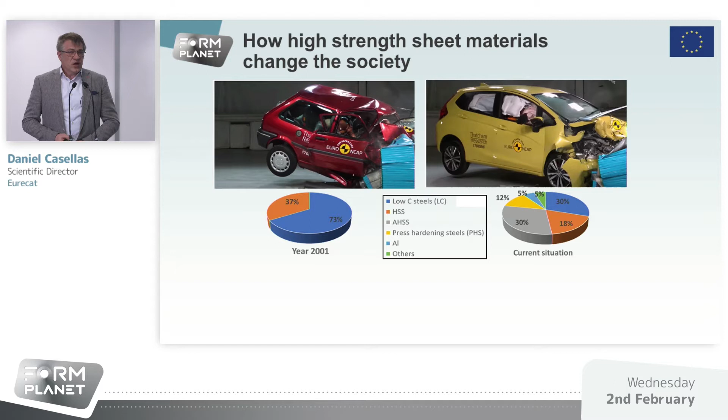We see here that high-strength steels and aluminum alloys play a major role in current cars, and they will be the dominant engineering materials in the body in white vehicles of the coming years. This is because they allow to construct lightweight structures in an affordable and sustainable way.

The use of high-strength metal sheet in the European industry is increasing in the last years. Automotive and aeronautic sectors are driving this growth, mainly pushed by the constant demands on high-performance parts for lightweighting. However, if we want a complete deployment of these high-strength materials, we need that the European industry can manufacture high-performance parts in an efficient and sustainable way. And this is where the high strength of these materials may be a problem.

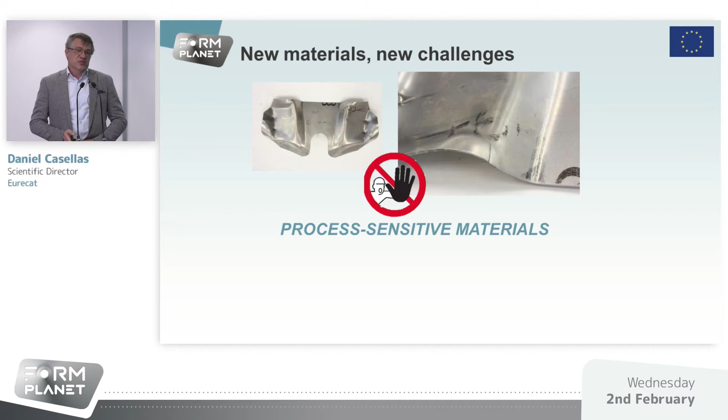Here we see an industrial problem that is known as edge cracking. We will talk about this today. This is an unexpected defect that happens during metal forming. So high-strength materials in general can be considered as process-sensitive materials, which implies that forming parameters and the raw material quality must be carefully assessed to produce defect-free parts.

The problem, or the challenge, is that these unexpected fractures cannot be predicted by conventional experimental techniques or by current modeling approaches. Then, as always, new materials bring new challenges. So today, in this seminar, the FormPlanet team will share with you the recent developments in advanced characterization techniques, in modeling, in process monitoring, and in materials intelligence to face these challenges that the metal industry is addressing.

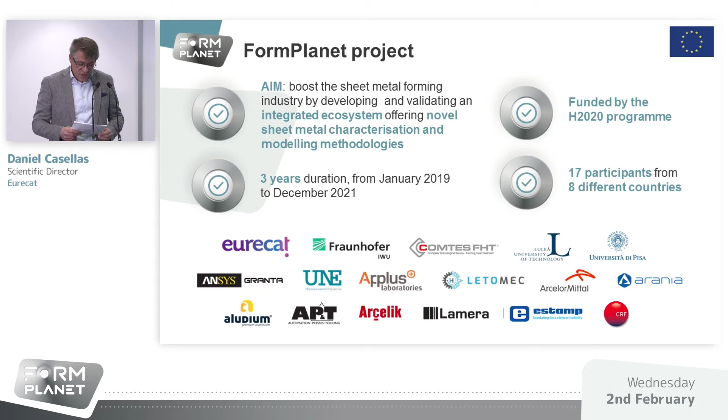Thank you, Daniel. I'm going to give just a brief introduction about the FormPlanet project. This is a European project with the aim to develop and validate an integrated ecosystem, called a testbed, to offer novel sheet metal characterization and modeling methodologies. This project has lasted 3 years and ended in December of last year, 2021.

The consortium of FormPlanet has consisted of 17 participants from 8 different countries: 3 technological centers, Eurecat, Fraunhofer, and Comtes; 2 universities, Luleå and University of Pisa; 4 service providers, ANSYS Granta, UNE, Applus+, Letomec; and 8 industrial partners, ArcelorMittal, Arania, Alupium, ART, Arçelik, Lamera, Estamp, and CRF. Now we are going to project the FormPlanet video. You will see summarized very well the main objective of the project.

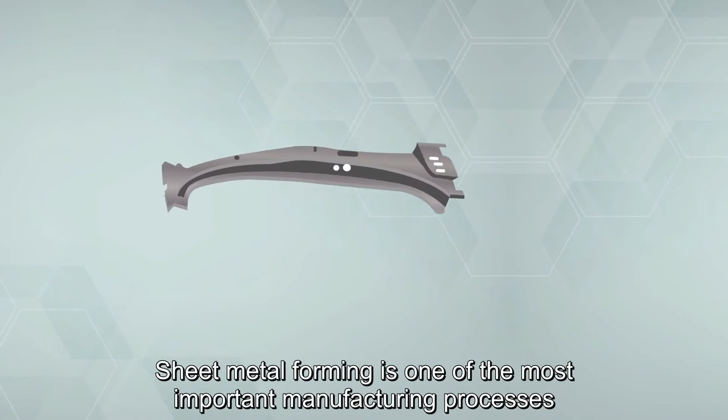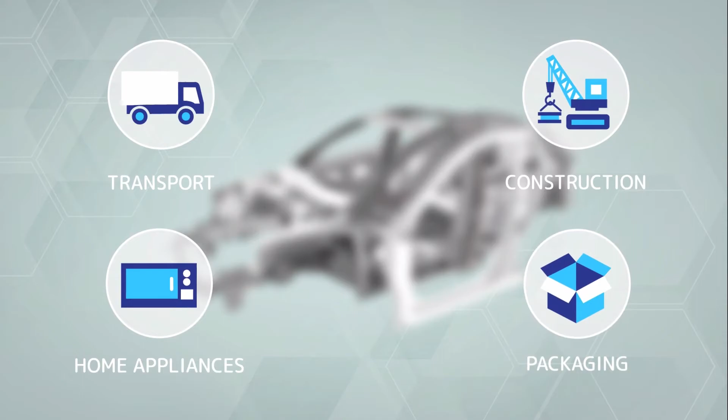Sheet metal forming is one of the most important manufacturing processes to obtain metal components for almost every industrial production sector, such as transport, construction, home appliances, and packaging. Generating over 500 million euros, this industry lacks adequate methods to assess sheet formability and part performance at the product design stage, essential to be able to develop high-performance parts at a reduced cost.

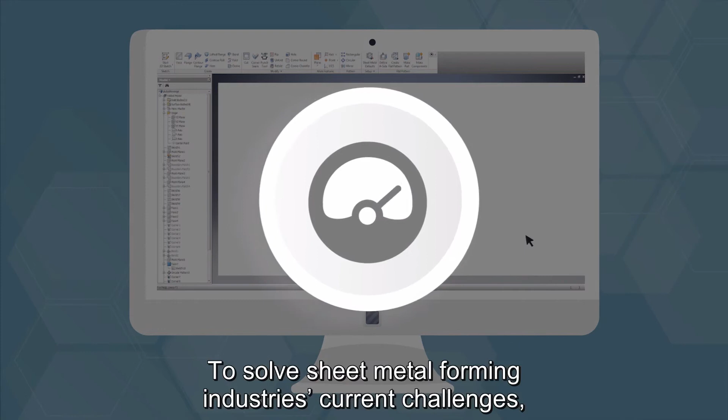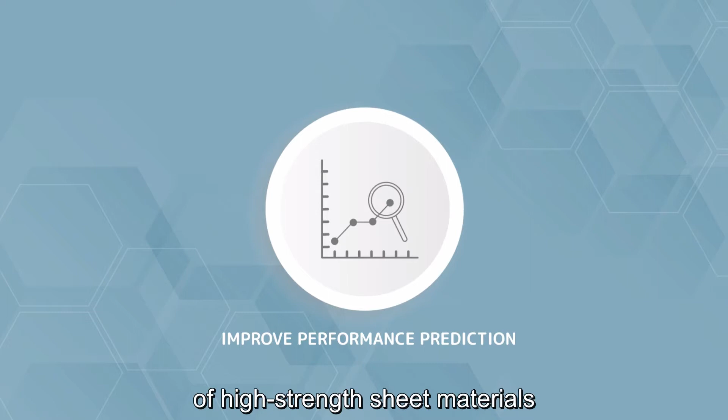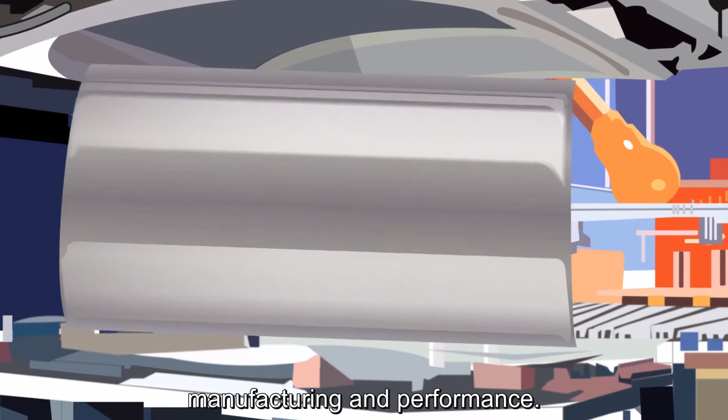To solve sheet metal forming industry's current challenges, the FormPlanet Open Innovation Sheet Metal Forming Testing Hub has been launched. Funded by the European Commission, we will offer to all kinds of companies in the sheet metal forming value chain novel testing methodologies and modeling approaches to improve the performance prediction of high-strength sheet materials and prevent production losses. This assures zero-defect production and the optimization of sheet materials development, manufacturing and performance. Thanks to FormPlanet, European companies will be able to access the services of 5 leading materials characterization centers from one place with equality of access and conditions.

A one-stop shop service combining the technological experience of consolidated metal characterization sites and cross-cutting service providers to facilitate companies' technological uptake. With novel and differentiated material characterization tests, new modeling approaches, part quality assessment, and in-process measurements, materials informatics, incremental sheet forming prototyping, and support services. A boost to the competitiveness of the sheet metal forming industry. Contact us to learn about our service offer and how FormPlanet can help your company.

Now, after these 3 years of project, we would like to share with you the main outcomes and the main results of this project during this event. I'm going to give you some facts very quickly, but during this event you will have more information about the results of this FormPlanet project. In the first year and a half of the project, we have developed advanced testing methodologies for more accurate sheet metal characterization and non-destructive in-process measurements and modeling. These methodologies and modeling approaches covered the whole value chain of the sheet metal forming industry, from the sheet material development, also the part and forming process design, to the components production.

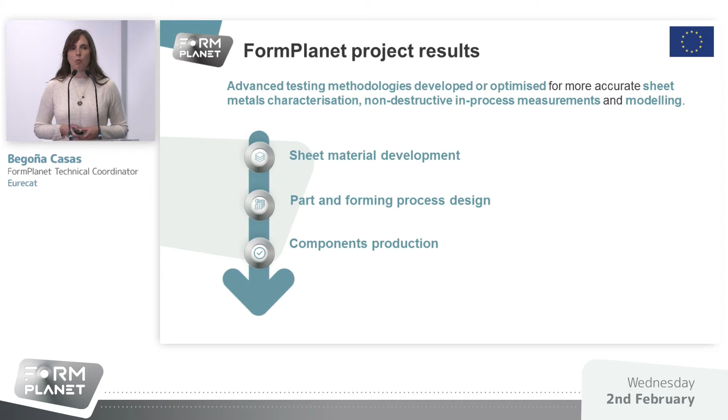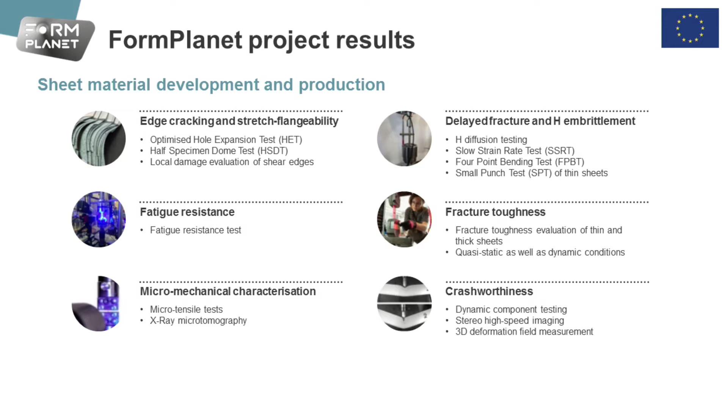Just to give a very brief idea of the methodologies that we have developed in the project concerning sheet material development and production: we have developed solutions, for example, for edge cracking and stretch flangeability, for delayed fracture and hydrogen embrittlement, also for fatigue resistance, fracture toughness measurements, micromechanical characterization, and crashworthiness determination.

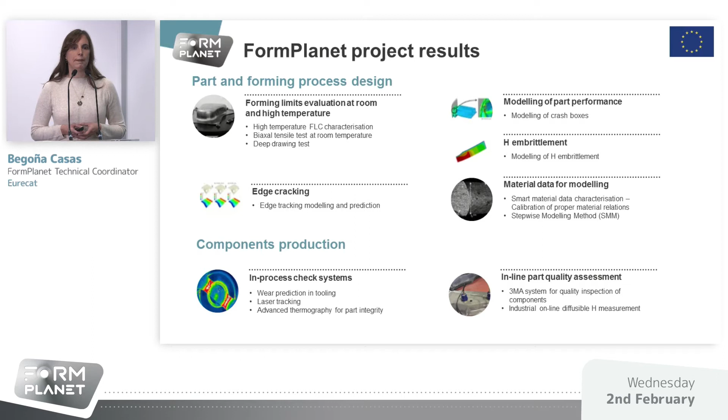Concerning part and forming process design, we have developed solutions to evaluate the forming limits at room and high temperature, for modeling part performance, also modeling hydrogen embrittlement, edge cracking modeling and prediction, and material data for modeling. Concerning components production, we have developed also in-process check systems and inline part quality assessment.

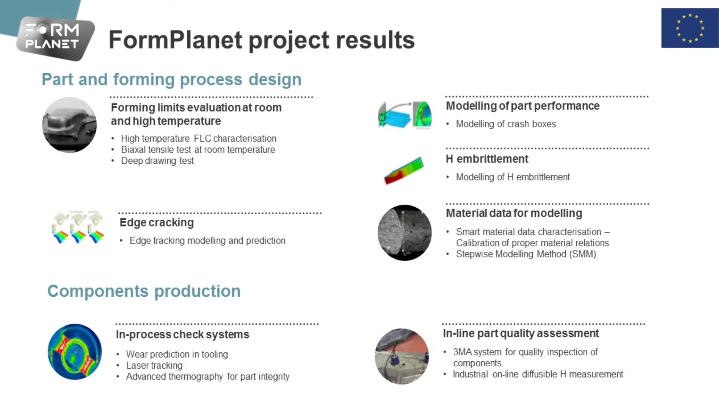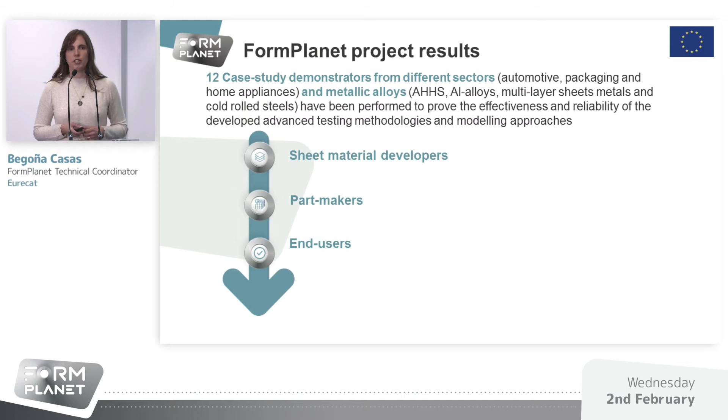To validate and prove the effectiveness of these methodologies and modeling approaches developed during the first years of the project, we performed 12 demonstrators from different sectors and metallic alloys with industrial partners of the project and also with the test sites. And these demonstrators covered all the value chain of the sheet metal forming industry: sheet material developers, part makers, and end users.

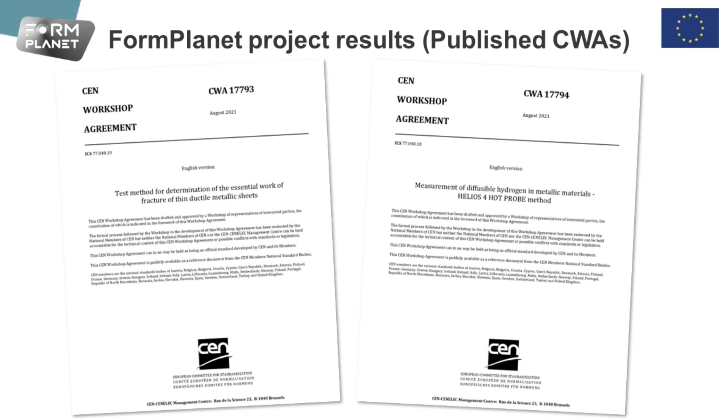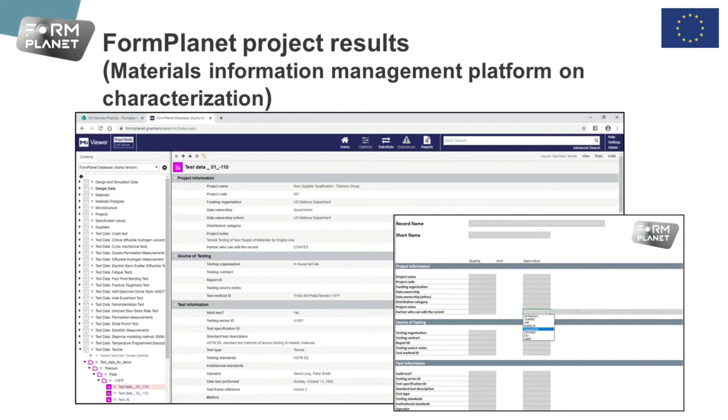During the project, we have published 2 CEN agreements with the objective of standardizing 2 novel techniques developed in the project. ANSYS Granta, a partner of FormPlanet, has developed a materials information platform on characterization with the help of all the partners.

And we also launched an open call during the last year to offer companies outside the project the opportunity to prove our services. 7 companies were selected in this open call from different European countries and different sectors.

And finally, the most important outcome and challenge of this project is the creation of the open innovation test bed for sheet metal characterization and modeling. It will consist of a single entry point to access or to offer services from leading characterization organizations. And all this will be explained in more detail during this day.

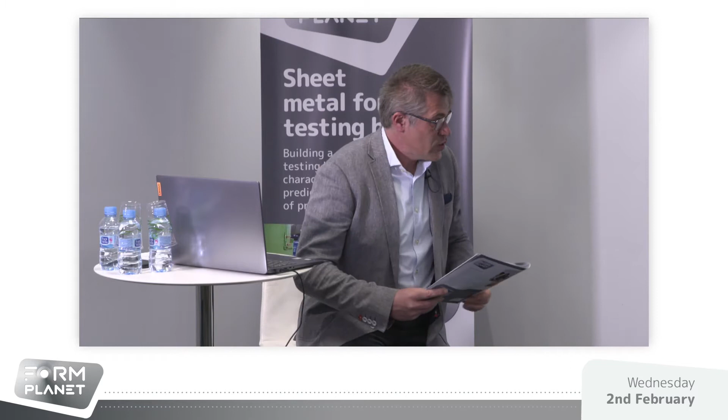Is this the mic? Yeah, this one. Thanks a lot for the presentation, Daniel.

As Daniel just mentioned, I will present the need for OITBs, EU policies, and funded research. These are the points I'm going to talk about today. I'm going to start by defining what an open innovation testbed is, because that's our main topic today. The Open Innovation Testbed is a set of entities which all together provide common access to physical facilities, capabilities, and services required for development, testing, and upscaling.

And all this covers from validation in the lab to the real industrial environment. All this is done through a single entry point. A single entry point is a legal entity defined and established by the project in order to manage all B2B relationships. It means giving access to these facilities, capabilities, and services to the end users, through this one-stop shop.

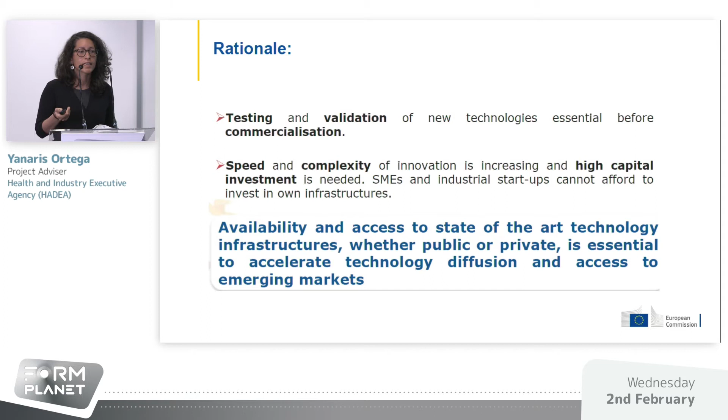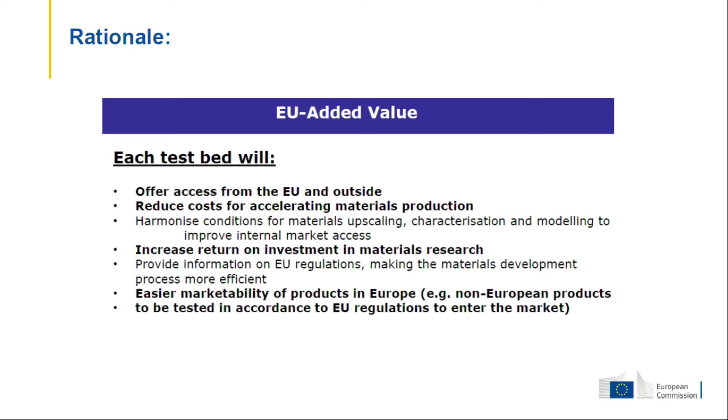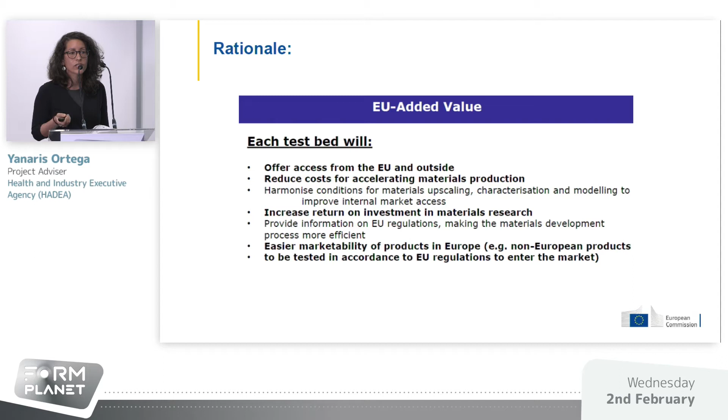So, as I said before, the OITBs will be bridging the gap between the lab and closer-to-market activities, so from TRL 4 to TRL 7. And what is the added value of the OITBs, and why are they so attractive for industry? Because they offer access to these capabilities and infrastructure. They reduce cost, which is an important point, but also raw materials and time to market. They harmonize the conditions for materials upscaling, characterization, and modeling, increase return on investment in materials, and make marketability of products in Europe easier.

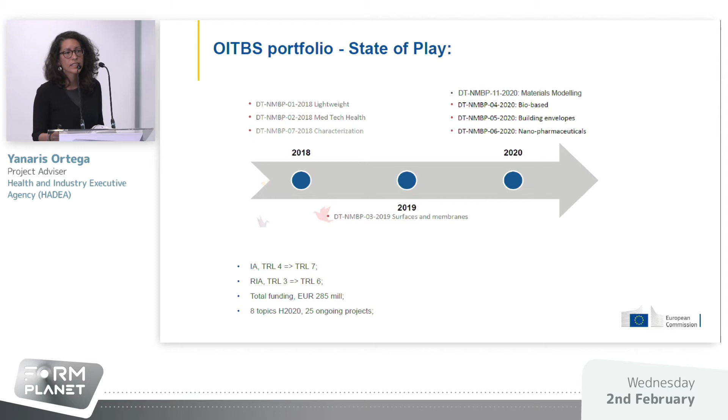At the European Commission, we have funded so far 8 topics with a total fund of 285 million, allocated in 8 topics and 25 projects. This is more or less the timeline for this portfolio of projects: 3 topics in 2018, the first generation of topics, then 2019, 1 topic, and 2020, 4 topics. All of them cover different expertise and different fields of research.

As I said, OITBs are a different kind of project. They are more complex, bigger in terms of beneficiaries, duration, and also funding contribution. On average, there are 26 beneficiaries, the duration is 49 months, and they have around 12 million of funding from the European Commission.

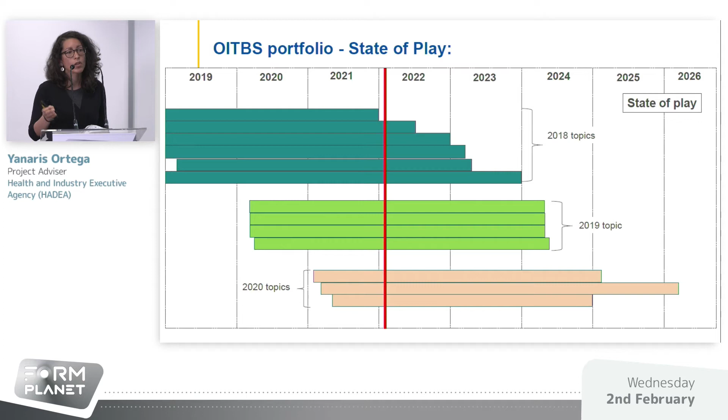So what's coming? Two main things. On one side, there is the organization of an OITB workshop. It's not organized by the European Commission. It's organized by the OITB projects themselves. So all of you projects, OITB projects ongoing or finished, but also industry or any kind of stakeholders that might be interested in this concept, in the services offered by the OITBs, are invited, because it's a good opportunity to give us feedback on the needs and the gaps that still need to be considered for funding. And also there is a call topic.

It's open currently in the Horizon Europe program, and it's on the climate neutral and circular innovative materials technology open innovation testbed. It's an innovation action. The funding is 34 million, and the TRLs to be covered by the proposals are between 5 and 7.

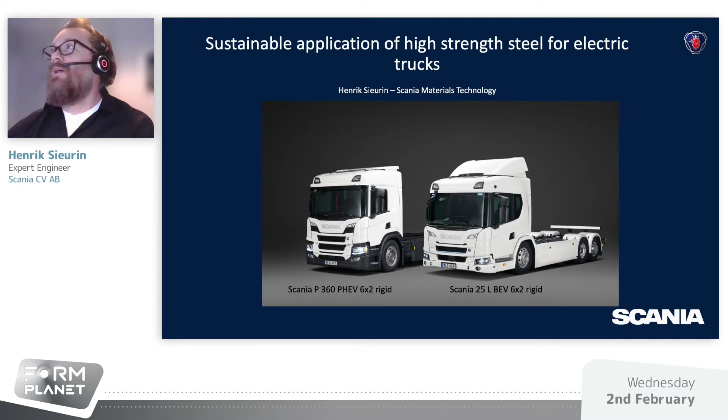So our purpose at Scania is to drive the shift towards sustainable transport. As you know, the world urgently needs to break the correlation between increasing demand for transport and increasing carbon emissions. So therefore, we are researching, developing, and promoting sustainable solutions for cleaner and safer transport of people and goods.

We are approaching a tipping point where the convergence of new technology and business models will result in a state where sustainable transport solutions will take off and become the new normal. And the current unsustainable solutions will be phased out. So the future of transport will for sure be decarbonized, clean, electrified, optimized, and digitalized.

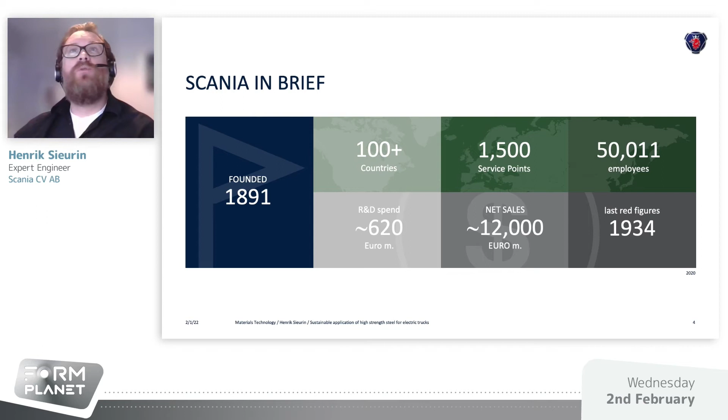So our trucks are mainly divided into three segments. We have long haulage, which is for sure the biggest segment, but we also have construction and distribution, and due to our modular system, we are very well equipped to also produce special need vehicles like fire trucks and garbage trucks.

One growing business is, for example, construction trucks for mining, which is a very flexible alternative to using big, expensive dumpers. Using smaller construction trucks is for sure a smaller investment cost, smaller service costs, and lower fuel consumption.

We also produce buses, both city and intercity buses. Traditionally, we have mainly produced chassis, but we are more and more producing complete buses. We also produce and sell engines, industrial and marine engines. For example, gensets for producing electricity, engines for agriculture, and ships and boats.

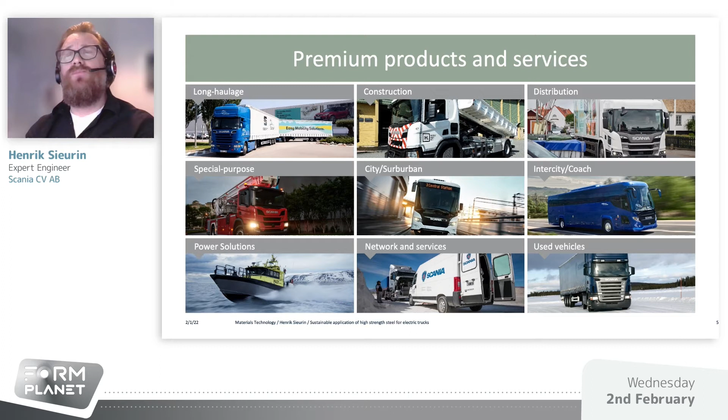One very important part of our business is the network and services, which include spare parts, maintenance, services like driver training, and financing. And we actually also sell used vehicles, which is a strategic business because we sell trucks and we can also keep the maintenance in Scania workshops.

So in order to commit to our sustainable transport vision, and so that it's not only some kind of buzzword for us, we have joined the Science-Based Targets Initiative, and we're actually the first heavy vehicle manufacturer that got this approved.

And our goal is actually even tougher, with 1.5 degrees instead of 2 degrees. And with this, we will reduce CO2 emissions from our own operations by 50% until 2025. And I think we have already achieved that goal.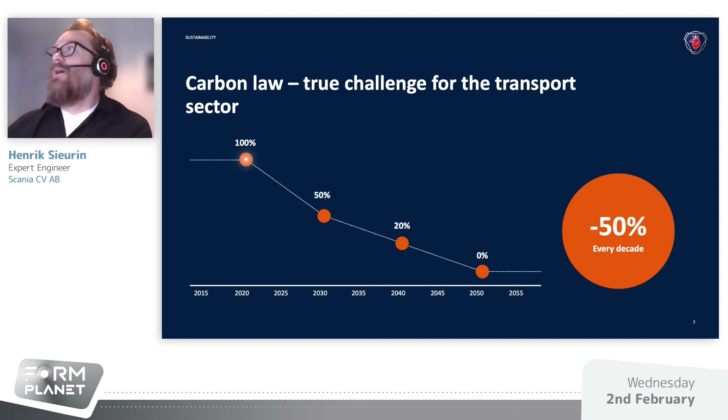So these climate goals are a really complex challenge for the transport sector. And the carbon law, a little bit simplified, says that we will halve our emissions every decade. So this is something that we have to fulfill. So when will electrification happen, and in what applications?

Well, this will happen much faster than we thought just 2-3 years ago. I think there are three reasons for this. Number one is the demand for sustainability from our customers as well as from ourselves. The second reason is cost. The total cost of ownership for an electric truck will be lower compared to an ICE truck.

And then we have the technical part. We already have batteries as well as charging, although of course we need to build a better charging infrastructure. So as already mentioned, in 2025 we expect around 10% electric vehicles, and by 2030 around 50%. And in 2030 we expect that more or less all applications can be driven electric, but of course it might not be an economically feasible solution for all customers and all applications.

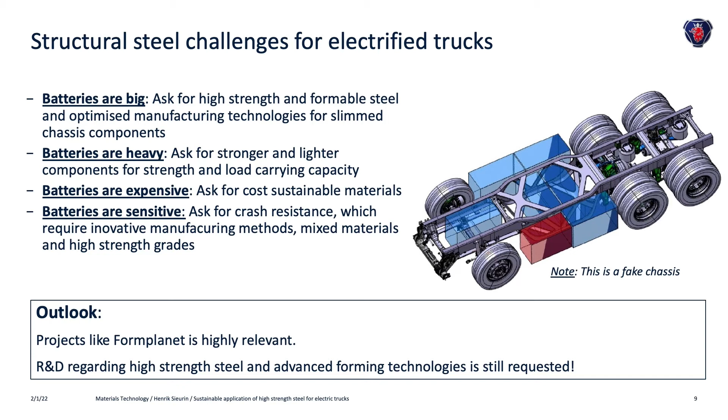And for this, we need high strength material and advanced or state-of-the-art forming technologies. Batteries are also heavy, and in order to maintain a satisfactory load carrying capacity, we need lightweight. In other words, we need high strength material. Batteries are also expensive, so we can't afford any fancy expensive material solutions.

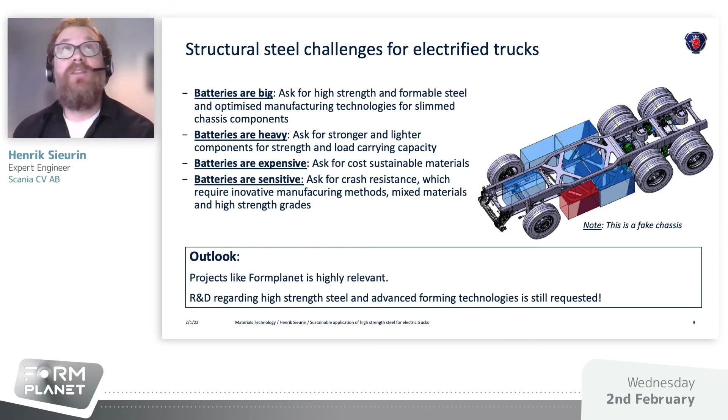And batteries are sensitive, so we need to protect them from crashes. So we need high strength material again with good energy absorption. We see a lot of mixed material solutions as well, and joining these is a challenge. So, to conclude this slide, I would say that projects like FormPlanet are highly relevant, and that R&D regarding high strength steel and advanced forming technologies is still highly requested.

Let's see what steel we use in our trucks today. If we start to look at the chassis, we mainly use hot rolled steel between 3 and 10 millimeter. It's mainly thermomechanical rolled steel, typically 355 MC or 500 MC or even 700 MC. We do use some press hardening steel also in the chassis for crash protection, for the bumper and the underrun protection.

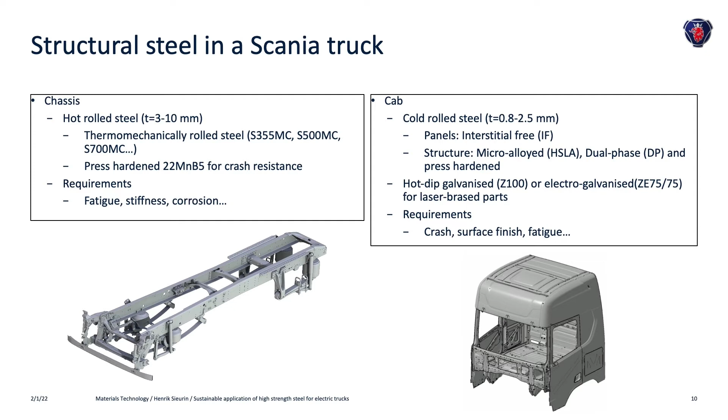And for the chassis, it's most often fatigue that is dimensioning, but also, of course, there are stiffness requirements, corrosion, etc. On the other hand, if we look at the cab, here we see really similar materials as we see in passenger cars, with similar thicknesses between 0.8 up to 2.5 millimeter. The panels are usually interstitial free steel. Here it's difficult to gain anything by using more high strength materials, since it's the stiffness that is dimensioning really.

Here it would be nice to have some thin material with high stiffness, like a sandwich material or something like that, or at least low density. But on the other hand, we need to have really nice surface finish. So that's a challenge. For the structure, we see high strength, low alloyed steels, DP steels, and press hardening steel, just as in the passenger car. And the sheets are galvanized, mostly hot dip galvanized, some electro galvanized as well. And the requirements for a cab are also rather similar to a passenger car, but with higher demands on fatigue, I would say.

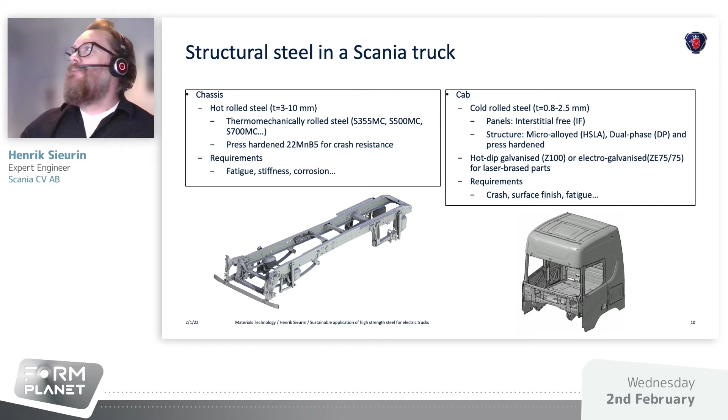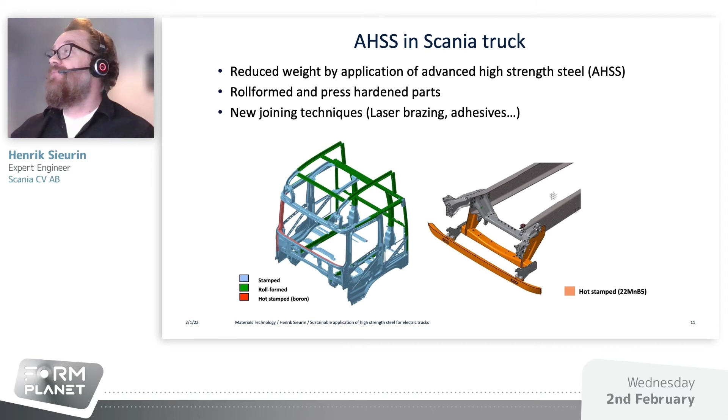So with our last cab generation that was released in 2016, we reduced, I think, around 10 to 15% of the cab weight by introducing advanced high strength steel, which was not used previously. We use a lot of roll formed high strength profiles in DP600, DP1000. We also have some press hardening parts like the A-pillar and this beam under the window. And the introduction of advanced high strength steel has also forced us to introduce some new joining technologies like laser brazing and adhesives. And as I said, in the chassis, we also have press hardening steel, relatively thick press hardening steel between 2 and 6 millimeter.

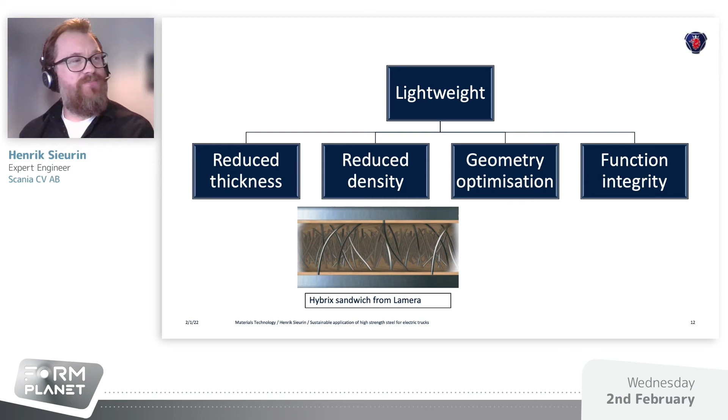We can optimize the geometry using topology optimization. The result from this usually is geometries that for sure need formable materials, so sheet material with good formability is required. We can also use function integration. That could be, for example, filling a side member or a cross member with batteries, so that the component is both a structural part and the battery box.

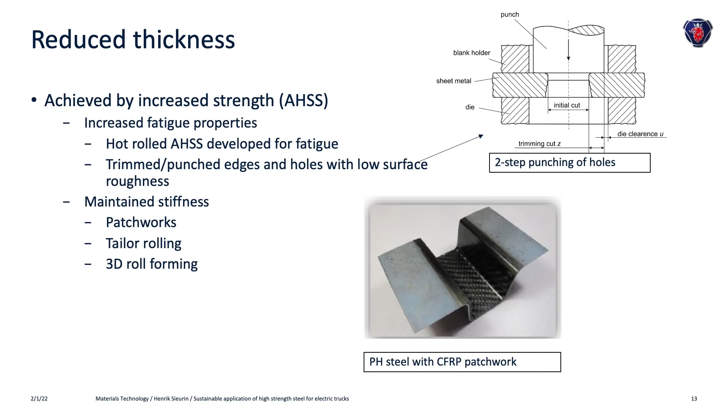I will focus a little bit more on the reduced thickness track, which can be achieved by using advanced high-strength steels. But for chassis components, there are some issues. As I mentioned, it's the fatigue properties that most often are dimensioning, and it's unfortunately not a linear relationship between yield strength and fatigue strength. In order to enable the use of more high strength material, we would like to see further development of hot rolled grades, maybe with focus on fatigue properties. And I know that there are many interesting projects ongoing in order to understand the relationship between microstructure, fracture toughness, fatigue properties, and hopefully we can learn from this and design new hot rolled steel alloys optimized for fatigue properties.

Another way to enable more high strength material is to focus on the edge and hole qualities. If we have a bad edge quality or a trimmed edge with small micro cracks, there's no point in increasing the strength of the material. It might even worsen the fatigue properties. So I have here exemplified this by using two-step punching or pre-piercing of holes, which is one way to achieve better surface qualities and enable the use of more high strength material.

And then, unfortunately, more or less all steels have the same E modulus. So when reducing the thickness, we might get stiffness issues. This can be solved by using, for example, patchworks or tailor rolling or 3D roll forming.

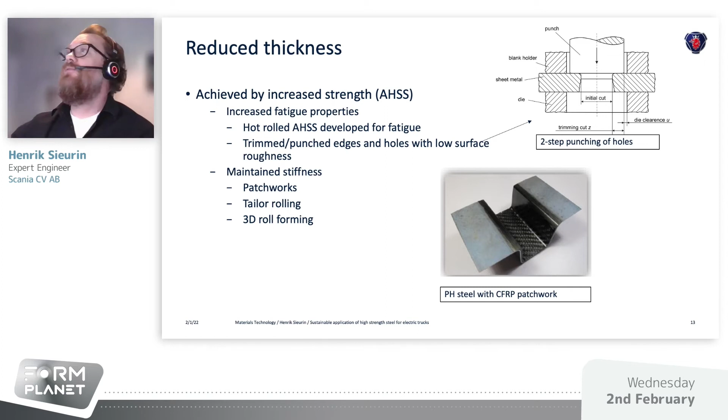Okay, I will now move over to this LCA study, where we study two reference vehicles, one ICE, one BEV, from cradle to grave. They are really similar except for the engine and driveline. We assume that they will drive 500,000 kilometers with an average payload of 6 tons. And we have also assumed that we have no reuse of the battery, so the full production burden is attributed to the vehicle life cycle. So you could say it's a conservative way to think.

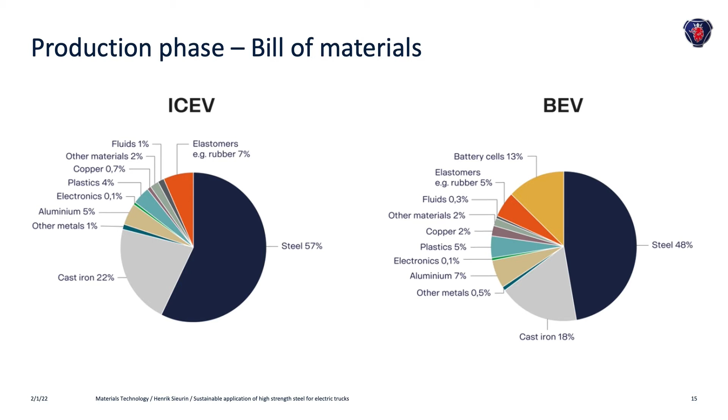So first of all, let's take a look at the bill of materials for the two reference vehicles. As you see, in both cases, it's about 50% steel, very steel intensive. And of course, one difference is that in the BEV, we have, in this case, around 13% battery cells. This will most likely increase when we increase the range of the vehicles. This reference vehicle has a driving range, I believe, about 250 kilometers. But in just a few years, we will have 500 kilometers. So this will increase.

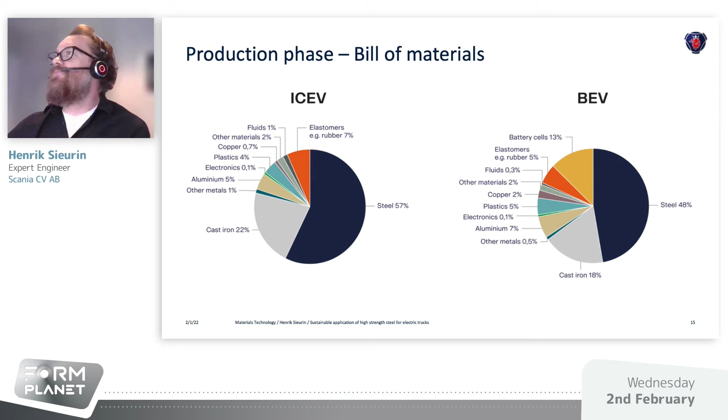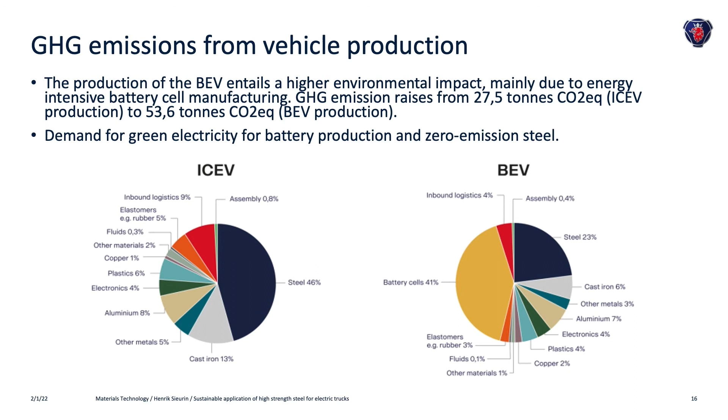So if we then look at the greenhouse gas emissions from the vehicle production, the BEV will have almost a double amount of greenhouse gas emissions from the production phase. For ICE, almost 50% come from the steel production. But for the BEV, on the other hand, the main part comes from the battery cells, which is due to the electricity used for producing the cathodes and anodes. They are today mostly produced in China with a rather bad electricity mix, but this is something that we need to focus on. But as you can see, steel is number 2, and this tells us that we need fossil-free steel production as soon as possible in order to reduce also this part.

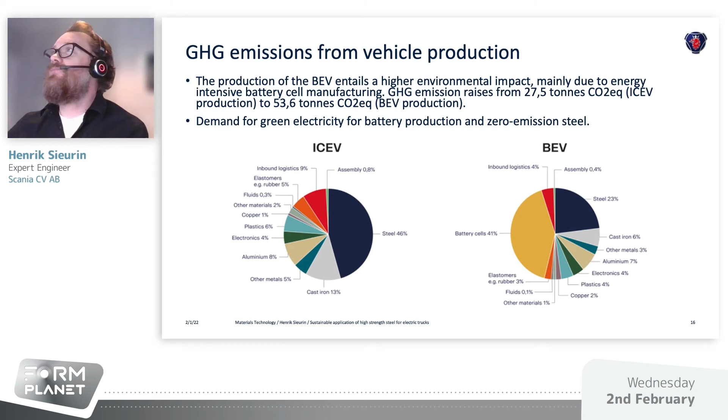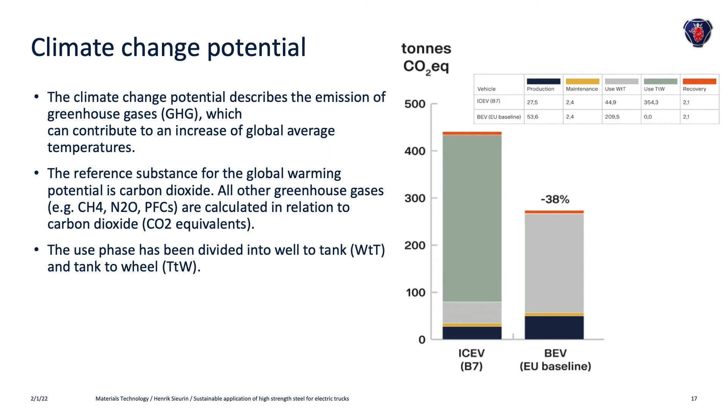So this figure shows the climate change potential. For this study, you see the CO2 equivalents on the y-axis for the ICE and for the BEV. As already said, the production part is worse for the BEV. Then the use phase is divided into well to tank and tank to wheel. So for the ICE, we have a really big impact from the tank to wheel, the combustion of diesel. For the BEV, on the other hand, we have a higher part for the well to tank. So this is due to the electricity mix that we use for charging the batteries.

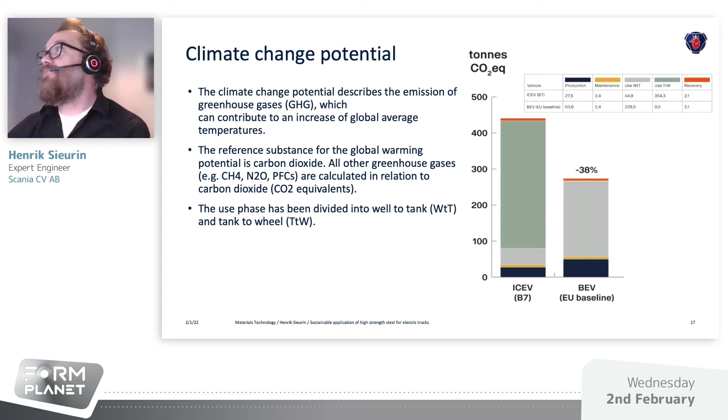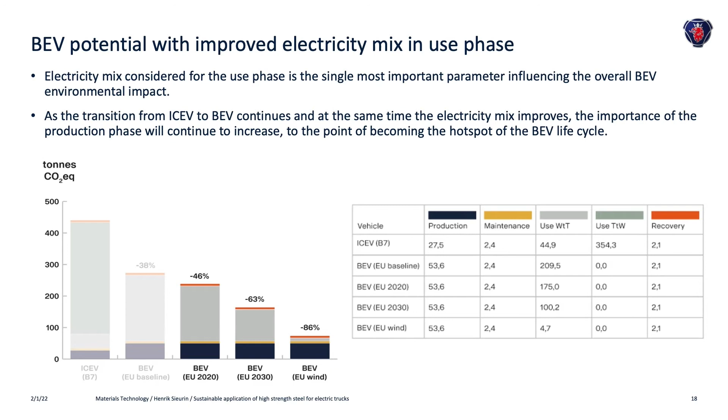But as you can see, here we have used the 2016 electricity mix in Europe. So here we have a 38% reduction with the BEV. But it's really the electricity mix in the use phase that is the most important parameter. Here we have looked at some other scenarios. If we see a continued reduction of fossil produced energy, we expect that in 2030, we have a 63% reduction for the BEV. And if we assume that we can charge the battery with pure wind electricity, there is an 86% reduction.

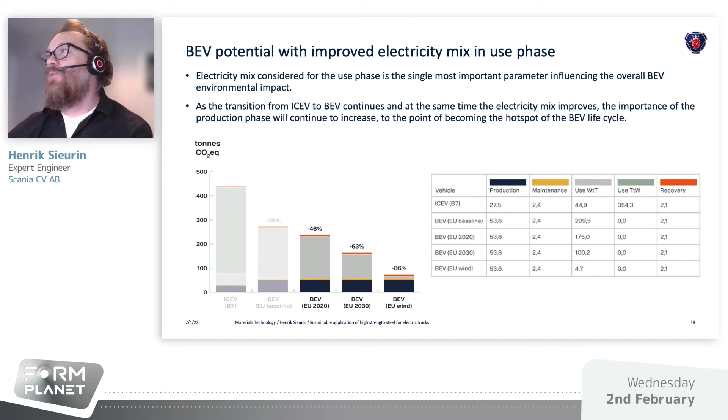But what we have left to work with is the production phase then. And if you remember, we need to have green electricity for battery production, and we need fossil-free steel, and with that, we will be well beyond 90%.

And finally, I come to the conclusions. I think I'm in pretty good time.

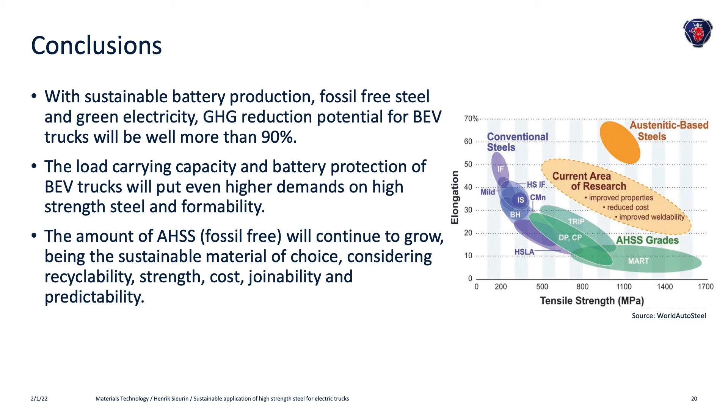So with sustainable battery production and fossil-free steel and green electricity for charging the batteries, the greenhouse gas reduction potential for BEVs will be more than 90%. And for load carrying capacity and battery protection, we will need advanced high-strength steel with good formability. And the amount of advanced high-strength steel will continue to grow, as I see it being the sustainable material of choice, considering recyclability, which of course is a very important issue, strength, cost, joinability, predictability, and so on.

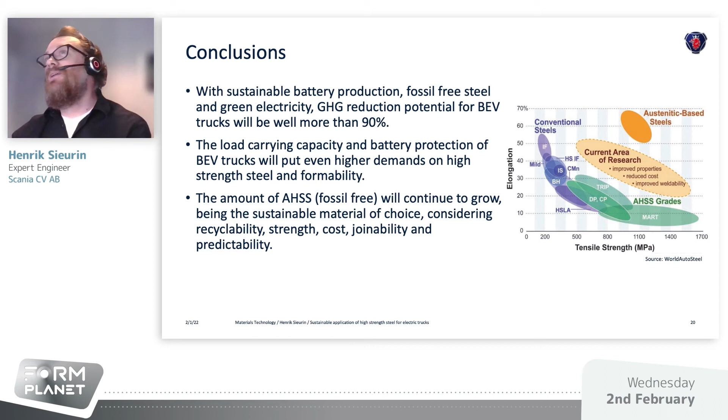But I thought this was going to be my first presentation in 10 years without the steel banana, but I managed to squeeze it in on the last slide, just to emphasize that we, as well as all other automotive companies, have a high interest in the high end of this banana curve. And for example, these quench and partitioning steels are very interesting, both for crash protection, for the cab mainly, but they might also have satisfactory fatigue properties. I don't know. I've seen both good and bad results there, but it's an interesting area, obviously.

So that was my last slide, and there are, I think, 3 minutes for questions.

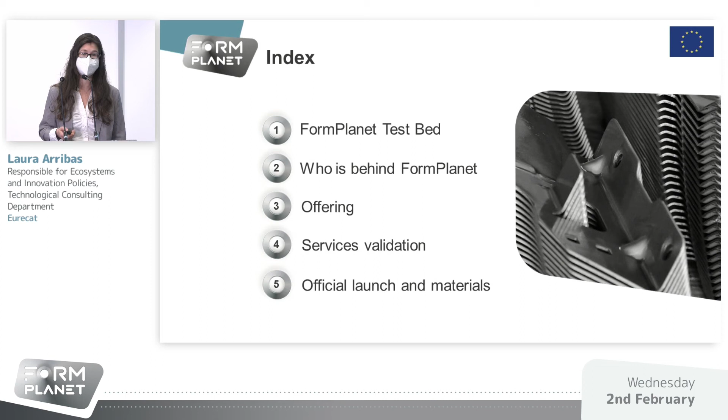Thank you very much. Good morning to everybody. This is Laura Arribas, and together with Eduard Piqueras, I will be presenting the FormPlanet testbed. So we will give a quick overview of what the FormPlanet testbed is and who is behind FormPlanet. We will also be talking about the offering of FormPlanet, how we did the validation of the services offered by FormPlanet, and finally the official launch of this testbed entity and the materials available online.

So, what is the FormPlanet testbed? The FormPlanet testbed is an open innovation testbed offering the most innovative sheet metal characterization, modeling, and quality testing services. I will not go into what an open innovation testbed is, because Yanaris explained that before, but just to let you know that during the project we've been working as an open innovation testbed ecosystem in a collaborative way, in the framework of a consortium agreement.

But now that the project is over, we need to move on, and we believe that the services and the work that we've been doing need to be continued, and we will be creating a new company to provide those services to the industry. My colleague Eduard will explain later on when it will be done.

But for the moment, just to let you know that the FormPlanet testbed is key for the sheet metal forming industry, because it is facilitating company access to sheet metal characterization, modeling, and quality testing services, which are really advanced for the industry, offering a full service package along the whole value chain of the sheet metal forming industry. There are a lot of benefits of creating this testbed. The first of all is the access to valuable technology services.

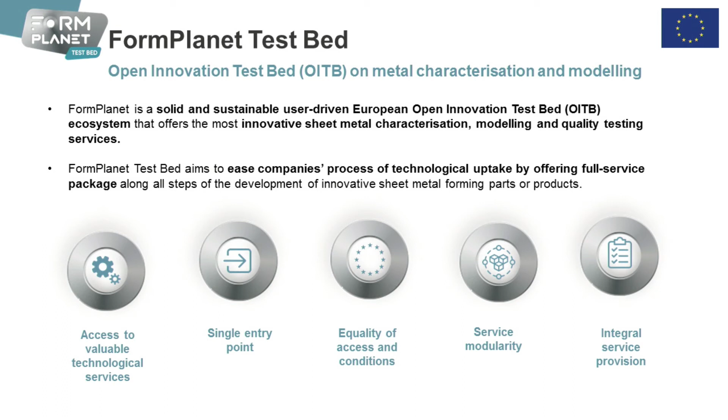In Europe, there are a lot of capacities that are really advanced, and they are not well known by the industry, and in this way they are not accessible for them. So FormPlanet wants to merge all these capacities together by using a single entry point to offer them, so that all the companies in Europe can easily access those capacities.

These services will be provided in fair and equal conditions to all the industry, so there will be no differences between countries. And the service portfolio has been designed in a way that takes into account all the types of companies that will be using it, both SMEs but also large companies. Considering the SMEs, we know that they cannot afford all the services, mainly the ones that are more expensive. That's why we've been designing the most expensive services in a way that they can afford them

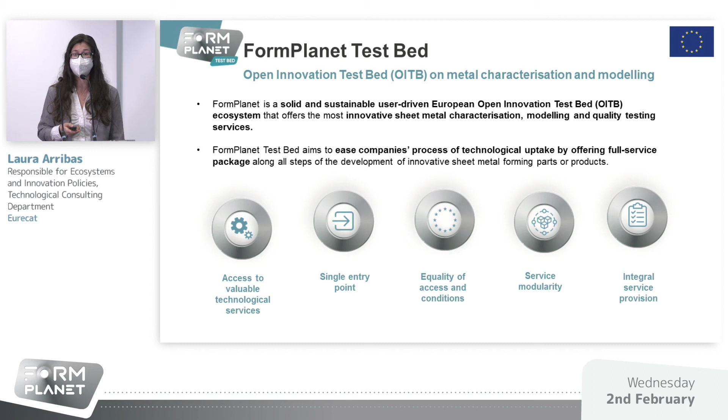in a modular way. And finally, we want to say that this Open Innovation Testbed, which is FormPlanet, will be providing an integral service portfolio, not only these novel services, but also the services that are complementary to this service portfolio, so that the customer can access the whole service picture, let's say.

Talking about who is behind the FormPlanet testbed, Begoña told you that there have been a lot of partners in this consortium, but now that the project is over, we need to move on, and this new entity that will be created in a few months counts on 3 main research partners in Europe, which are Eurecat, based in Spain, Comtes, based in the Czech Republic, and Letomec, based in Italy. These 3 main partners, for the moment, will be the shareholders of this new entity that will be created to offer this service portfolio that I will explain later on.

Of course, this is not closed. We are, as I was saying, in the process of creating this new entity, so we are still working on the collaborative agreements between the partners. So, well, we are open to any proposal still.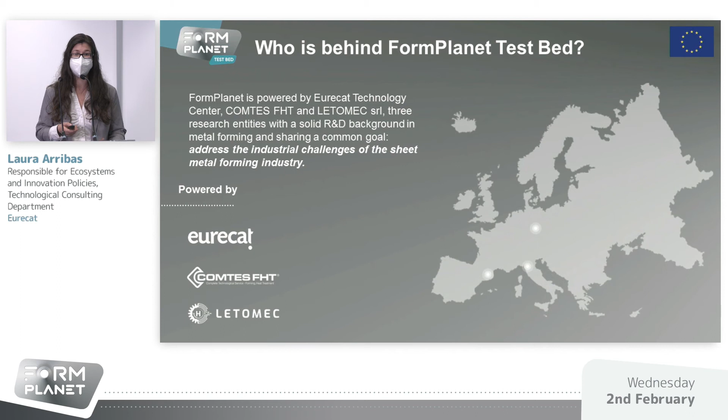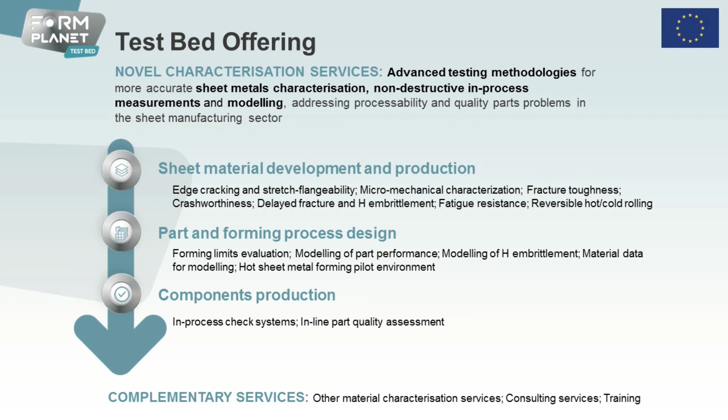Which is the offering of the testbed? As I was saying, the offering is based on these novel characterization services that will be provided. But it will also account for the complementary services to provide this full service offering to the companies. The novel characterization services are mainly advanced testing methodologies that tackle sheet metal characterization and non-destructive in-process measurements and modeling. And they are addressing all the challenges in the sheet metal industry.

This service portfolio has been designed considering the different stages of the value chain to facilitate the understanding by the customers. In this sense, we've identified sheet material development and production as part of the value chain, also part and forming process design, and also components production. For instance, for sheet material development and production, we have edge cracking and stretch flangeability, fracture toughness, and crashworthiness.

For part forming and process design, we have forming limits evaluation, also the modeling of H embrittlement and material data for modeling. And finally, for components production, we have in-process check systems and inline part quality assessment. As for the complementary services, to give this full service offering to the companies, we also have other materials characterization services that will be provided in the framework of the testbed, and also consultancy and training services.

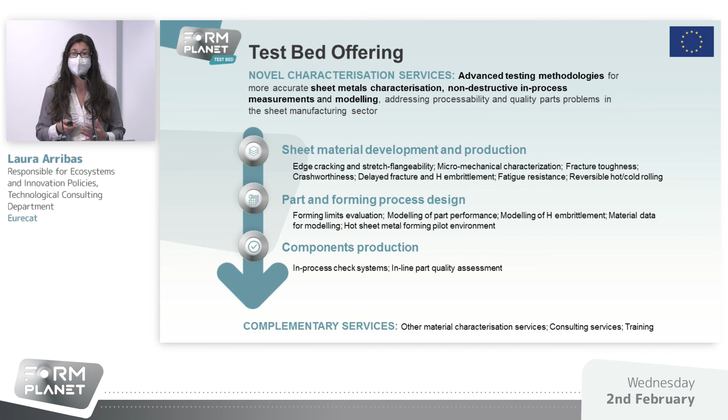All these services, mainly the advanced ones, will provide really differentiated benefits with respect to the existing methodologies in the state of the art. For instance, they are working towards ensuring zero defects production, developing new performance sheet materials at reduced cost, reducing time to market, and developing new high performance sheet metal parts at reduced cost.

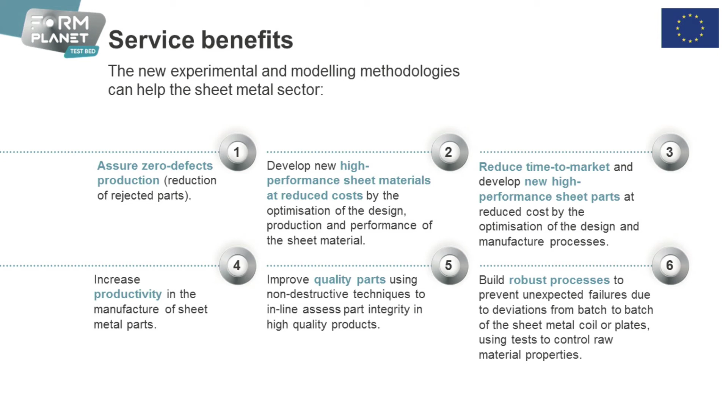Also working towards increasing the productivity of sheet metal parts, improving part quality, and building robust processes. These benefits have been tested during the project, and my colleague Eduard will explain it later on in a few minutes. But before that, we want to share with you the FormPlanet video on the testbed.

How can you achieve the production of zero defects sheet metal products with the many challenges standing in your way?

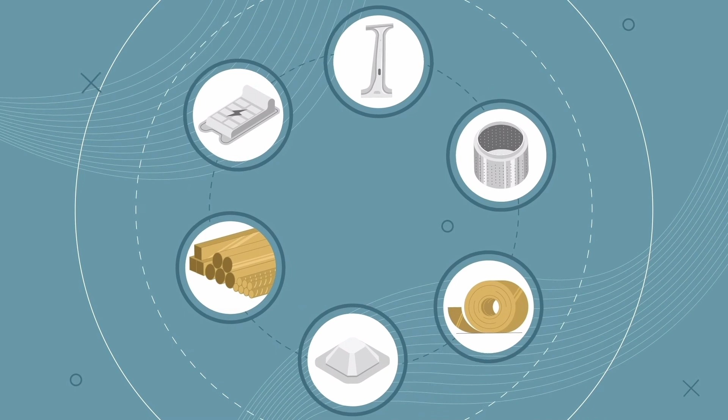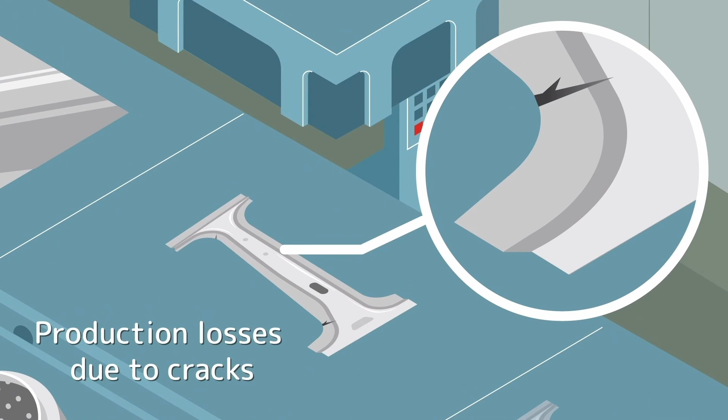Difficulties to assess sheet formability, non-expected part performance, and production losses due to cracks are just a few of the obstacles manufacturers deal with when launching new products and materials into the market. FormPlanet Testbed empowers the sheet metal forming industry's competitiveness.

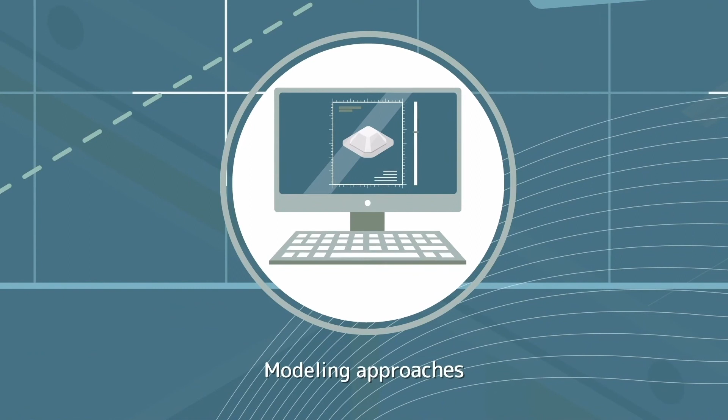Working with us means having access to a one-stop shop, providing integral advanced metal characterization methodologies, non-destructive in-process measurements, and modeling approaches to assure a zero defects production and optimized sheet material development, production, and performance. Our services, offered by leading research and innovation entities across Europe, provide market solutions to your current industrial challenges.

Whether you are a small, medium, or large enterprise, you can benefit from FormPlanet Testbed with equality of access and conditions. As your innovation partner, we will help you by increasing productivity, improving product quality, optimizing processes, and cutting the time to market for your future high-performance metal parts and products. FormPlanet Testbed, fostering advancement in the sheet metal forming industry.

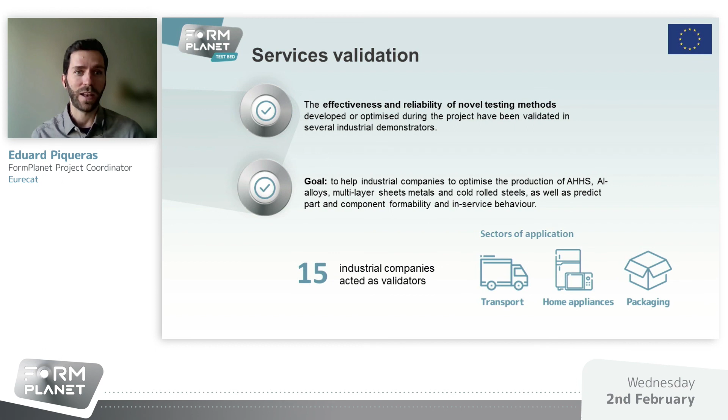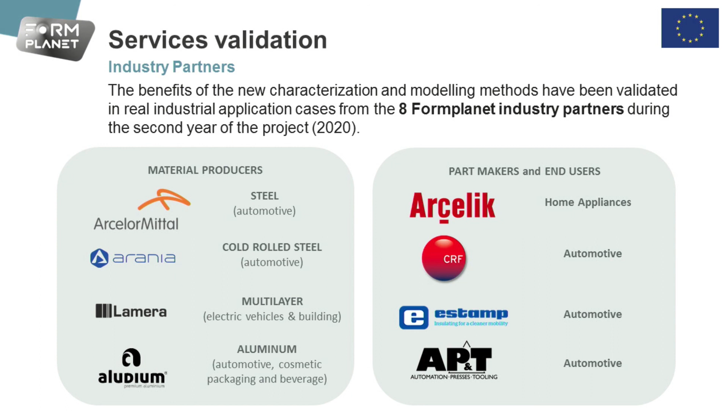Next slide, Laura. First of all, in our consortium, the FormPlanet team, there were eight FormPlanet industry partners, intended to cover the whole value chain of sheet metal. That means there was representation of industries producing sheet metals, the column of industries on your left: ArcelorMittal, a steel producer for different sectors, very well known as an automotive steel provider.

Arania, producing cold rolled steel for the automotive sector. Lamera, producing a multi-layer material that, as Henrik from Scania was mentioning previously, is an advantage when looking for low density materials. And Aludium, producing aluminium, another solution for low density materials. Aludium works with sheet aluminium for automotive, but also for other sectors like cosmetic packaging and beverage.

And on the other side, on your right, to complete the value chain of the sheet metal, there were those industries using sheet metals to produce advanced parts and advanced products. In this part we have a representation of different sectors. A big part of the challenges in new materials, as we heard in the beginning, is in automotive. In this sense, we had CRF, the research center of Fiat, Stellantis Group, Estamp, also working in automotive, and AP&T. We also worked in the home appliance sector with Arçelik, a part maker in this sector.

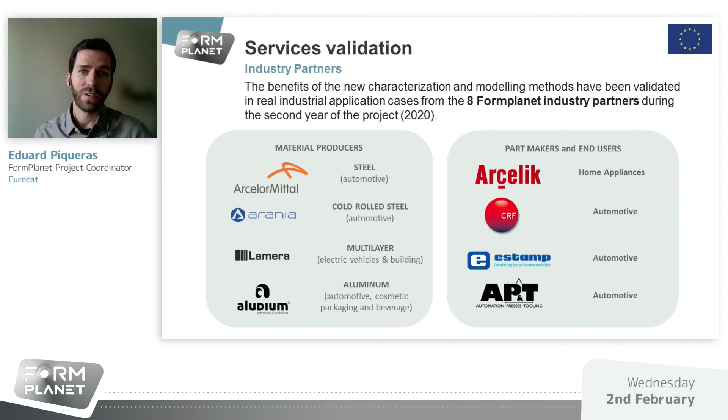We applied the methods and models to different real industrial cases in these industries. And what we measured is how these new methods benefit these industries, in terms of fewer rejected parts, less rejected material, reducing the time to market of new materials, reducing the costs associated with rejected parts, etc. After this, in the second year of the project, next slide, Laura.

What we did was launch an open call within the project. The open call had two main goals. On one side, we wanted to test how the B2B relations of the single entry point would be handled, the operation of the Open Innovation Testbed acting as a single entry point for industries looking for help in solving their challenges. On the other side, we kept validating and measuring the benefits of the new characterization and modeling methods. That's what we had been doing with our industrial partners from the project consortium, and we continued with these 7 awarded industry use cases from the FormPlanet open call.

In the open call, we selected 7 companies from 14 applications. These companies received the services that the Open Innovation Testbed will offer. We got different companies working with different materials and in different sectors like transport and automotive, but also machinery, manufacturing, and home appliance. Next slide.

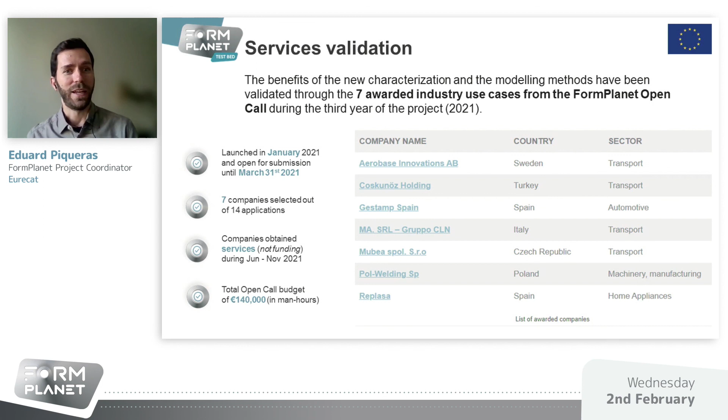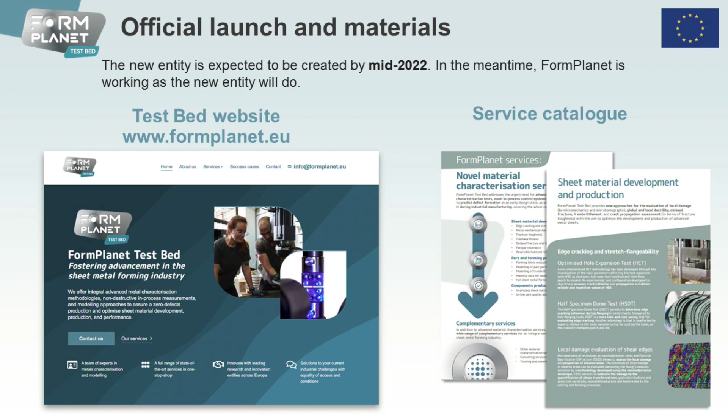Once we got this first validation with industrial partners from the consortium and the second validation with companies from the open call, we made sure that these new characterization and modeling methods bring important benefits to companies developing new sheet metals and working with new sheet metals for advanced parts and components. We also tested the operation of the Open Innovation Testbed. So now all is ready to officially launch the first Open Innovation Testbed in sheet metal characterization.

The new entity is now finishing the last adjustments to be legally established, so it's expected to be created by the middle of this year. But nowadays, FormPlanet is already working as an Open Innovation Testbed. So companies can already ask for help to solve their material challenges. The Open Innovation Testbed is running; despite not being legally constituted, you can consider it working.

You can go to our website, follow us, ask for help, ask for advice. You have our detailed characterization and modeling service catalog. You can take a look there, ask questions, etc. So yes, this conference acts as the official launch of the first Open Innovation Testbed for sheet metal characterization and modeling.